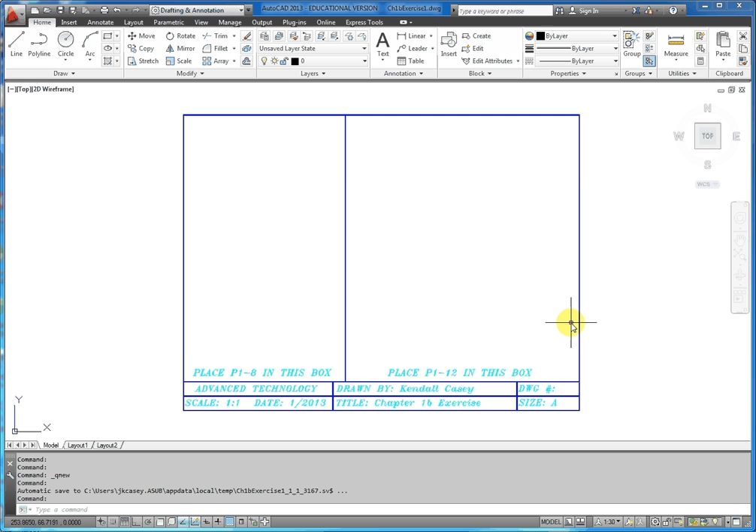I'm going to start this project with the 30 millimeter diameter circle on the left hand side. I'll start with the circle tool, beginning somewhere in this area. It doesn't really matter. I'm going to use the diameter option, and put in 30.

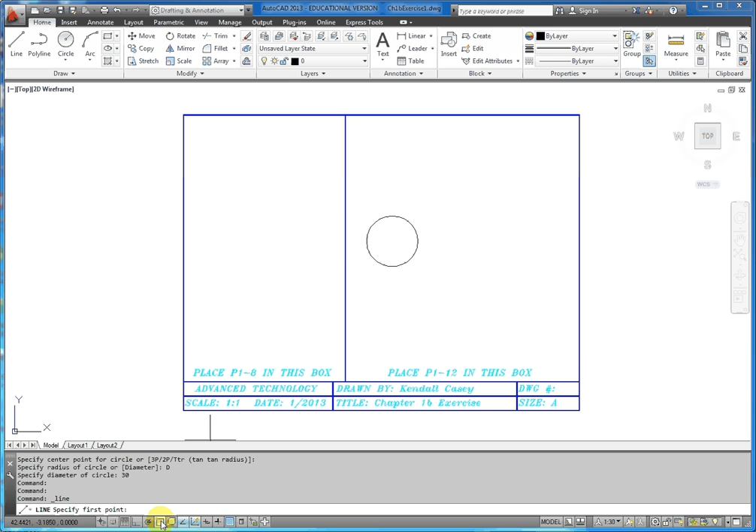Next I'm going to draw a line from the center of that circle, turning on my object snaps. Straight over, turning on ortho mode, straight to the left 20 millimeters. That's where the end of the ellipse needs to go.

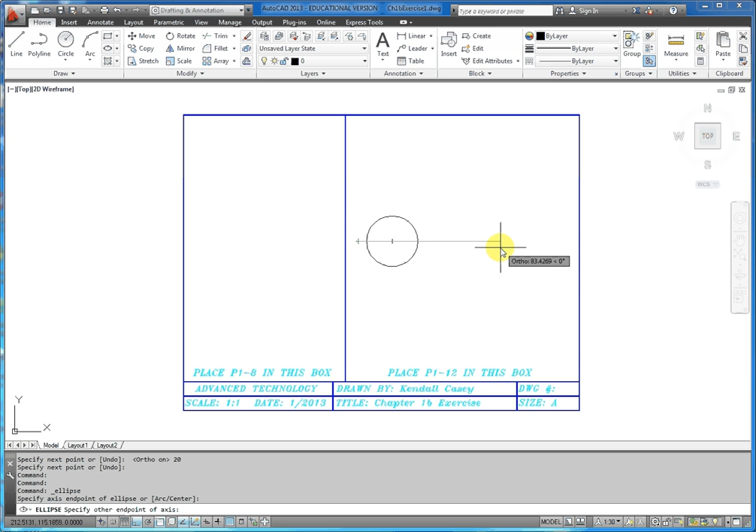So the next thing I'm going to do is start the ellipse tool. It's going to go at the end point of this line, over 70 millimeters, and up 25 millimeters.

Okay, so I can erase this construction line. The next thing I'm going to do is draw another construction line from the center of that circle straight to the right. 60 minus 20 is 40, so that'll find the other center of the other hole.

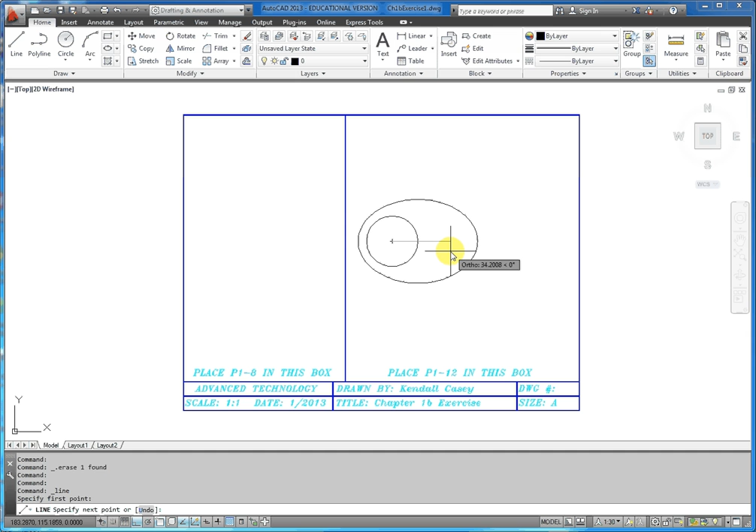And I'm going to draw another circle at the end of that line. Again, I'll use the diameter option, and that circle has a diameter of 10.

So you can see it's progressing nicely. The next thing I might want to do would be to draw another line from the center of this smaller circle straight over out to the far right side, which would be 40 millimeters.

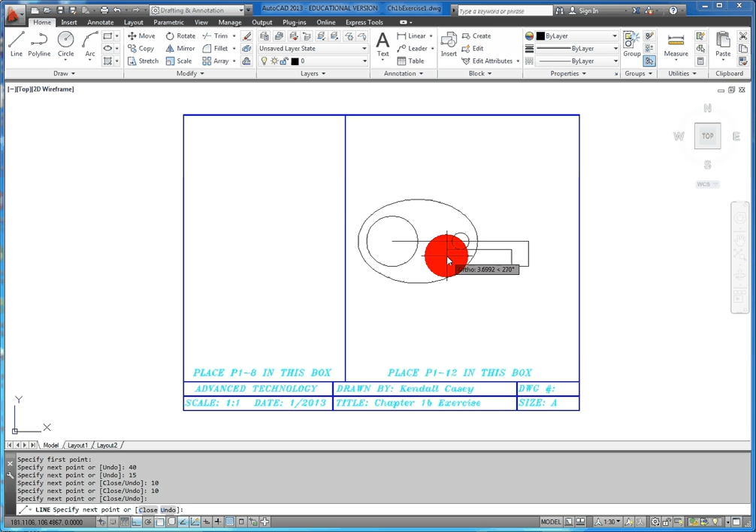And then I'm going to come down 15 millimeters. I'm going to go back to the left 10 millimeters, and back up 10 millimeters, and I'm just going to bring my line back in this way somewhere and stop it out here somewhere. It doesn't really matter where. So I've got kind of the lower half of the tail of the fish, if you will.

The next thing I'd like to do is use the mirror tool to make the top half of this tail fin, if you will. So I'm going to pick on mirror, select the objects that I want to mirror, and right click to advance the command.

Watching my command line, it says to specify the first point of the mirror line. So I'm going to pick the end point of the center line, and move straight to the other end of that line.

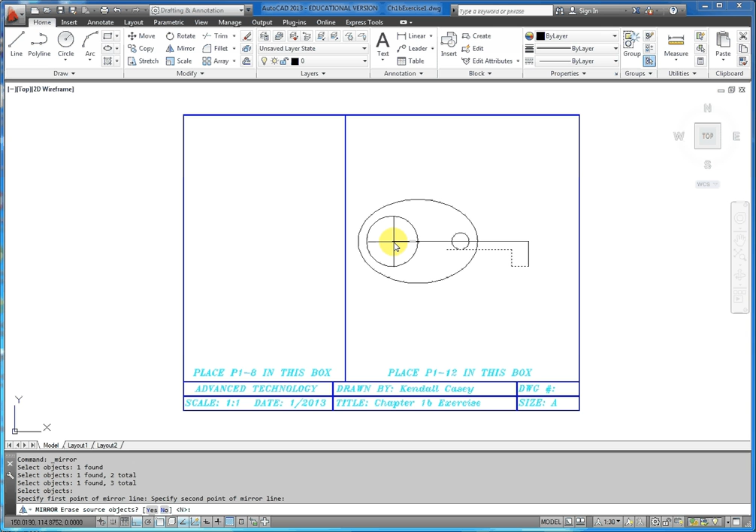Now AutoCAD is asking me if I want to erase the source objects. In this case, I want to say no. Notice that the N is in the angular bracket, so that's the default value. If I press enter, we have that taken care of.

And I'm going to extend this line up by left clicking on the upper grip. It turns red, and I left click to place it there. I'm going to deselect that line by pressing the escape key. And so you can see it's really starting to come together.

I'm going to use the trim tool to kind of trim up some things. I want to trim this piece of the ellipse out and this piece of these lines. So the trim tool is on the modify panel. AutoCAD asked me to select the cutting edges, so the cutting edges will be this ellipse, this line, and this line. Those are the only cutting edges.

So I'm going to right click to advance the command, and then I select the pieces that I want to go away.

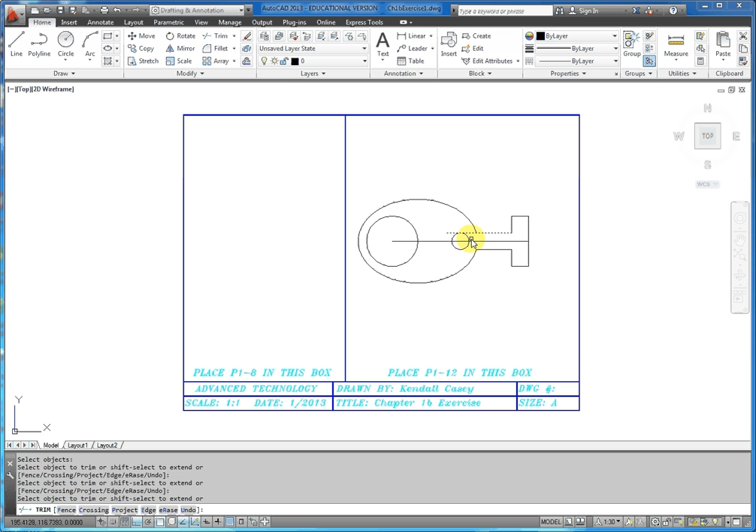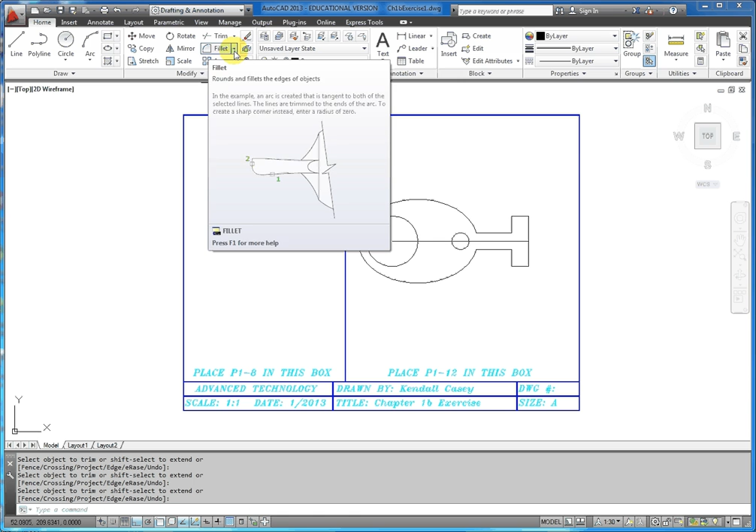Right click to finish up the command. The next thing I want to do is create this chamfer on the end back here, called a chamfer with a flat edge. Chamfer and fillet are similar commands. Chamfer is hiding behind the fillet tool, so I'll use the drop down arrow, pick the chamfer tool, and notice my distances are already set to 2 by 2, which is correct.

If you needed to change that, you would use the distance option here. But we're in good shape, so I can simply select the two lines. I pick this line and this line. I'm going to right click to advance and repeat the command, this line and that line.

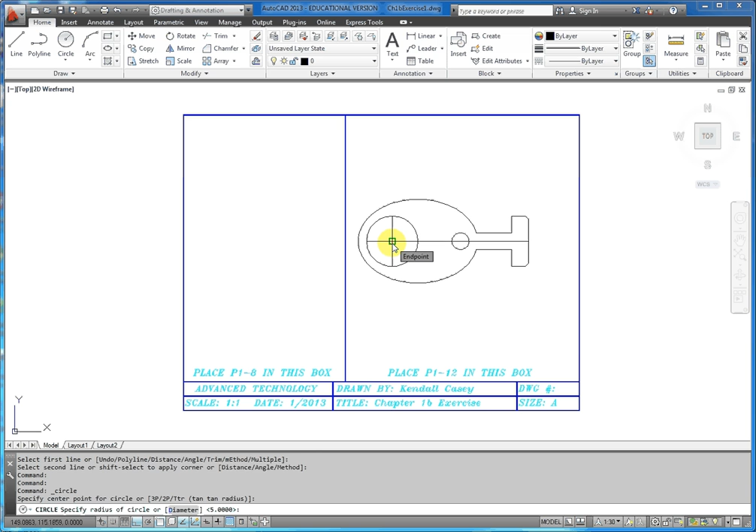Now I'm going to place a couple more circles. I'll pick my circle tool, and for the first one, the center point is here, using a radius of 20 according to the drawing. I'm going to place another one at the center point of the smaller circle, with a radius of 10.

I'm going to offset the ellipse using the offset tool, again on the modify panel. AutoCAD asks me to specify the offset distance. In this case it's 5, so I type in 5 and press enter. I select the ellipse and pick inside of it because I want the new offset ellipse to go inside the original, so I left click one time inside there.

So I have a little bit of cleanup to do here. I'm going to pick the fillet tool, make sure my radius is set to 2, which is what the drawing specifies, and use the multiple option here so I can create multiple fillets.

Create those 2 fillets, and I need to mirror, just like we did before, these 2 fillets and this arc. So I pick the mirror tool, select those 2 radiuses, right mouse click to advance the command. The mirror line will be the same center line we used before, and once again I don't want to erase the original parts.

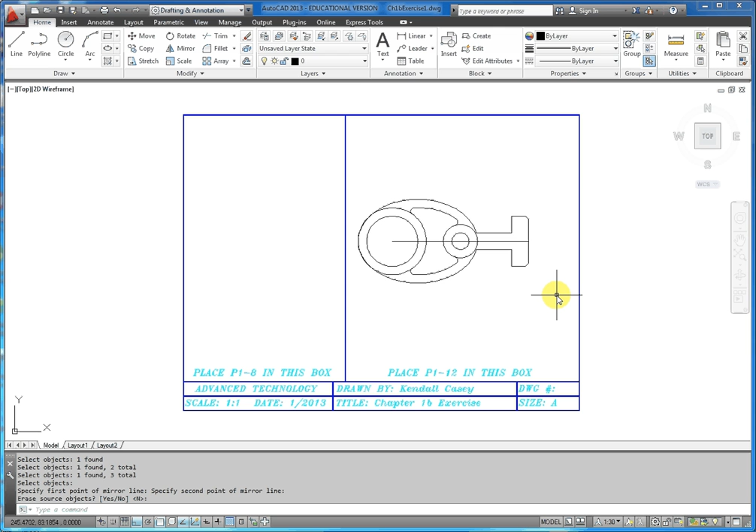I'm going to trim. My cutting edges will be my little fillets. I'll right click to advance the command, and then pick the pieces of the circle that I want to go away.

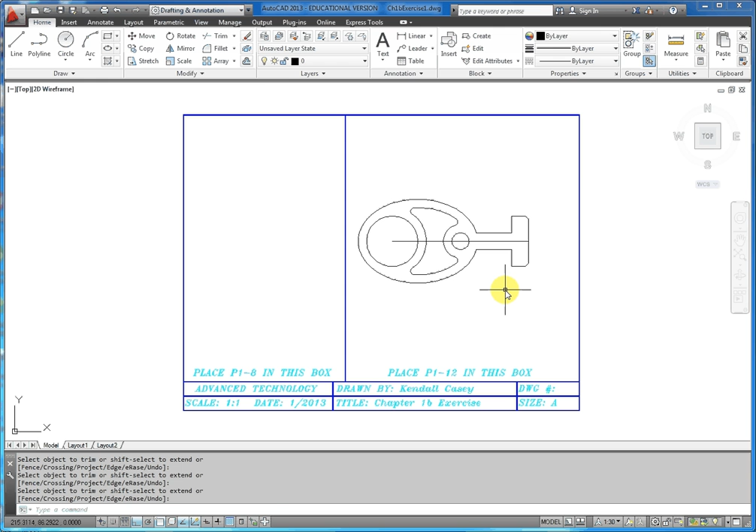I now need to add a few more fillets, so I'll pick the fillet tool, again with radius set to 2, and again use the multiple option to allow multiple fillets at a time. I pick these 2 lines and make these little curves between these 2 segments.

The only thing I have left now is the hexagon in the center of the circle. We have a polygon tool behind the rectangle tool, so we'll use the arrow to fly that out. We'll pick polygon and read our command line, which asks how many sides. In this case it's a hexagon, so there are 6 sides. I type the number 6 and press enter.

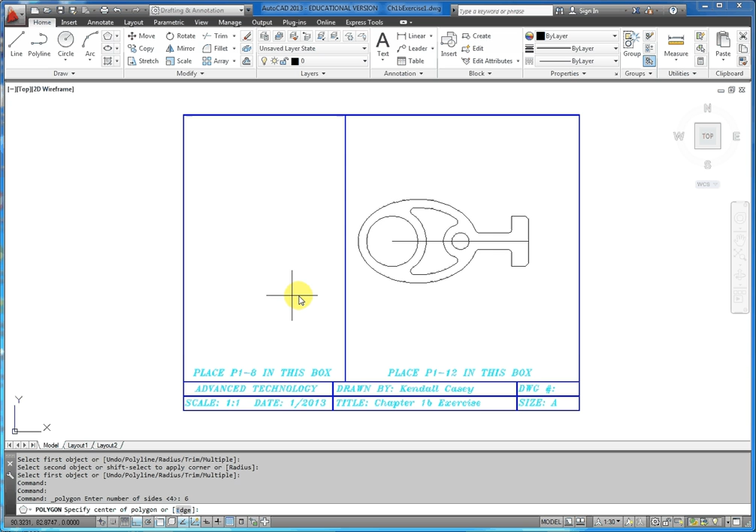The center of the polygon is going to be the center of the circle. Since the dimensions are given across the points of the hexagon, we're going to use inscribed. Had the dimensions been given across the flats of the polygon, we would use circumscribed - that's the difference between the two options. So we use inscribed, and I point my cursor straight down and type in the radius value, which would be 10.

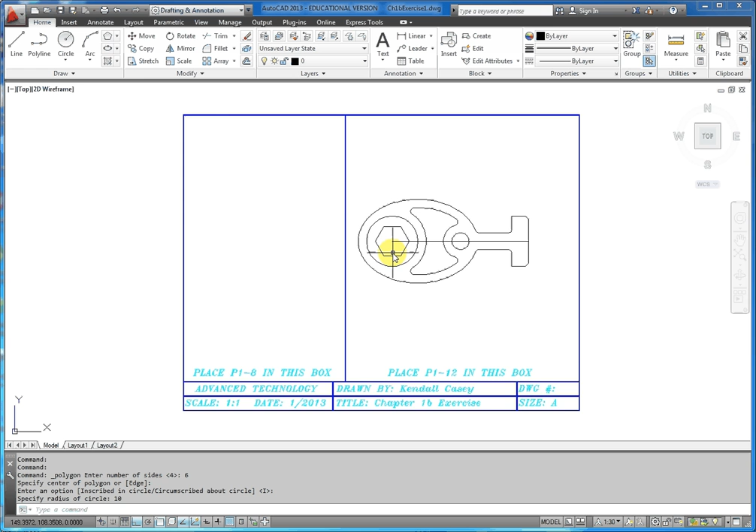Now I'm not sure why it rotated on me, but the points on the drawing should be the other way, so this is a good opportunity to demonstrate the rotate command. I'm going to pick the rotate tool off the modify toolbar. AutoCAD asks me to select the object to rotate, so I left click my hexagon.

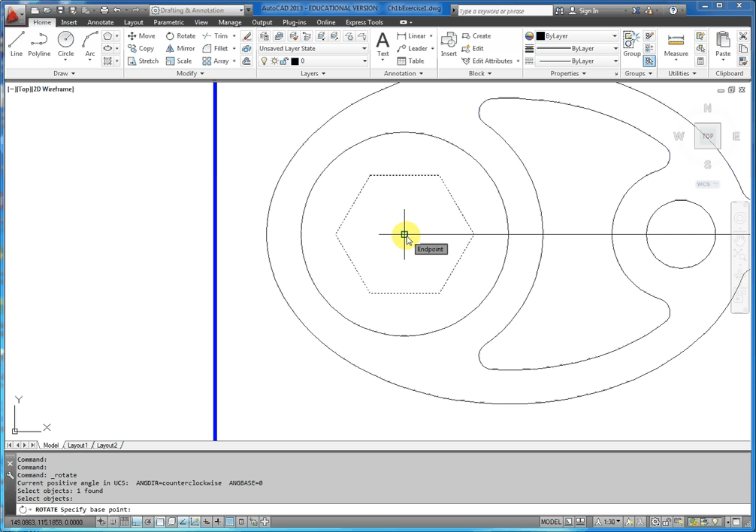The center point will be the base point for the rotation, and I can point my cursor straight down, making sure I'm not seeing any object snap symbols, and left click again, and the symbol's been rotated. I can zoom in and out with my mouse wheel. I'm going to erase my center line construction lines, and my part is finished.